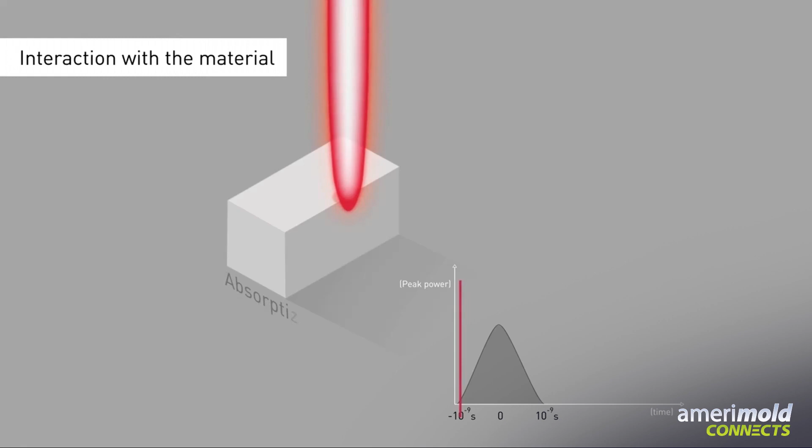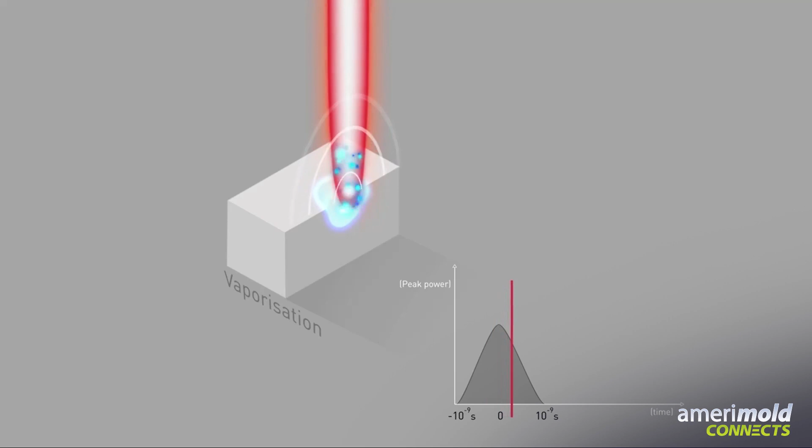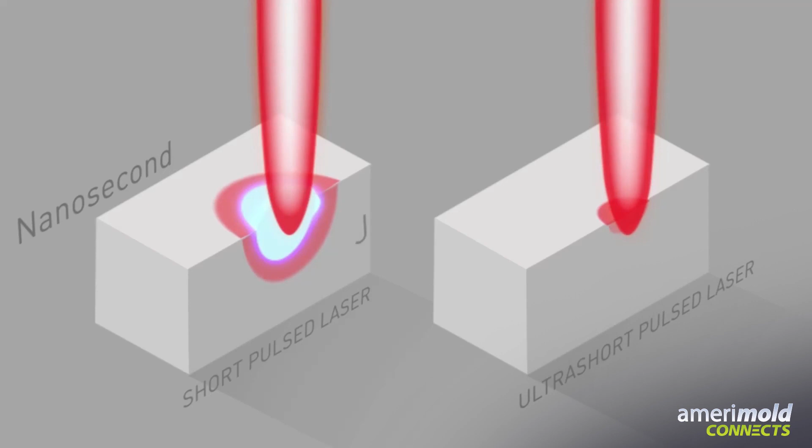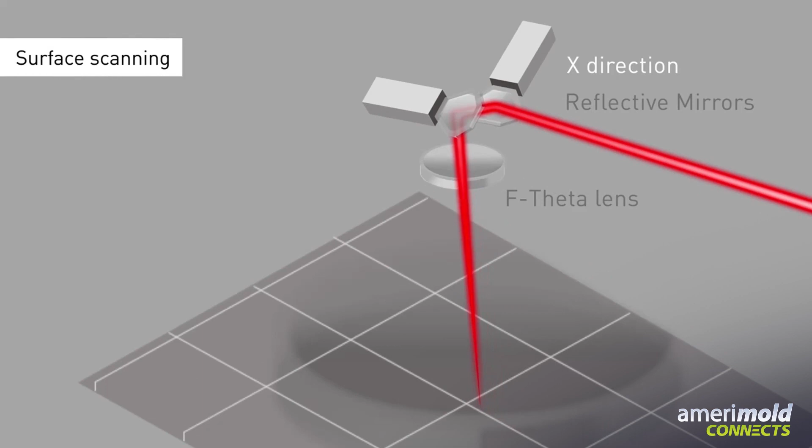GF makes a couple different kinds of lasers. Nanosecond and femtosecond just refers to laser pulse duration, but the one we have here at Wisconsin Engraving is a nanosecond laser. The laser source is in the back of the machine. The laser beam is directed from the source all the way through the machine and out the laser head. Inside of the laser head is a couple of small mirrors called galvo mirrors, which are used to direct the beam along a path.

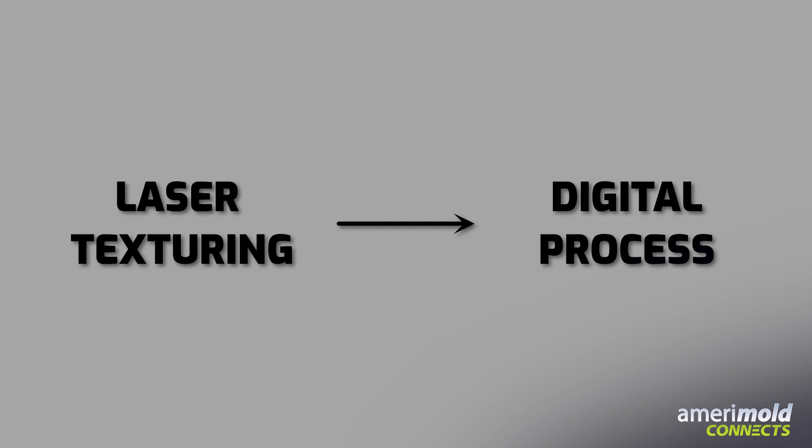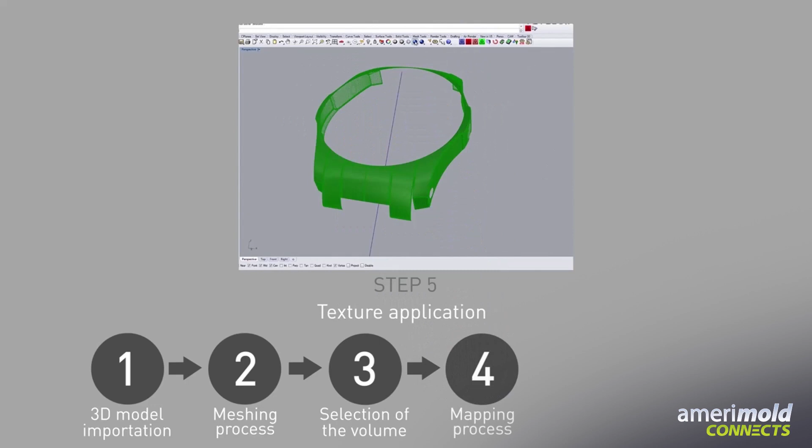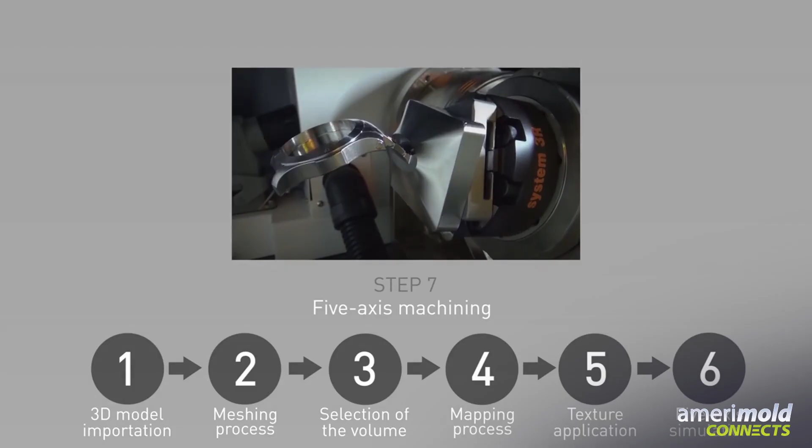It is important to remember that laser texturing is a digital process. GF has a good outline for the digital process workflow, which you'll see in this next clip. They go over it pretty quickly here, so I'm going to give a more thorough explanation for each of these steps. So, we're starting with step 1, importing the 3D model into Rhinoceros 5.0. Once imported, the model has to be carefully placed. We are working off the center of the block for this one, so that's where our 0 has to be.

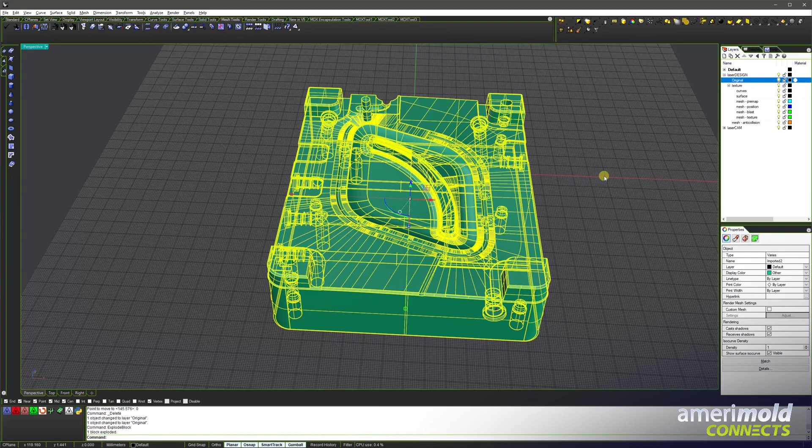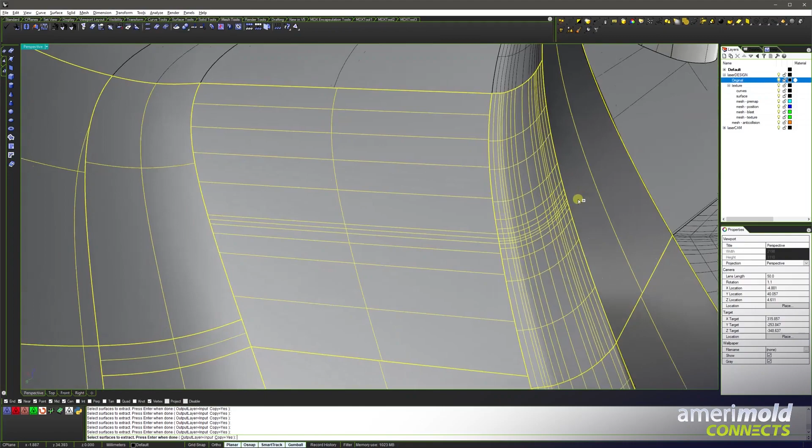The steps are a little out of order, but that's alright. We're moving on to step 3, selection of the area to be textured. Going through the 3D model and carefully selecting the surfaces that need attention. This takes a little bit of time, so we'll just speed through it. The surfaces are selected, everything is joined and organized, and then we can move on to the next step.

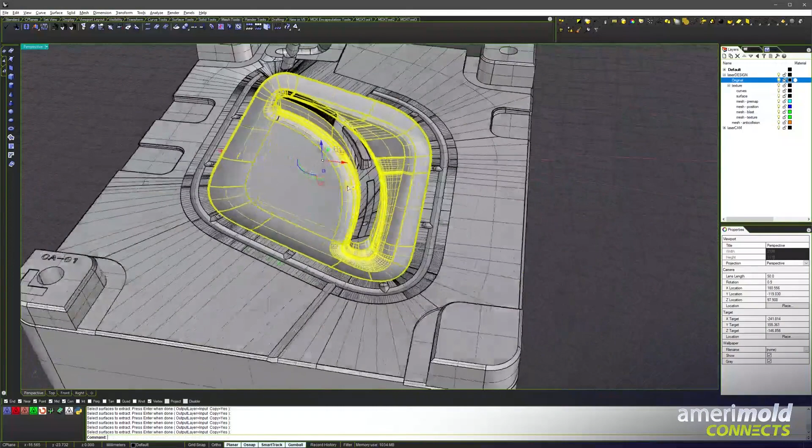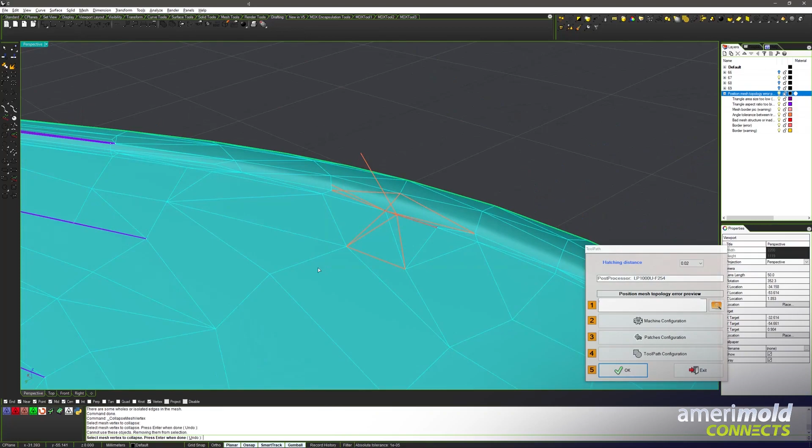Alright, we're on to step 2, the meshing process. The surfaces are selected and converted into a mesh. The box on the right here is GF's laser design application. It functions as an add-on to Rhino. It includes some tools for checking the mesh's compatibility with the post-processing that eventually must happen. Repairing a mesh takes a while, and this can be one of the longest steps.

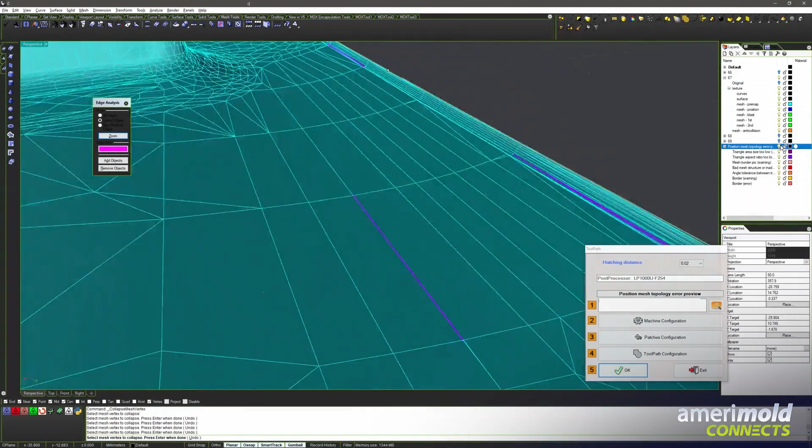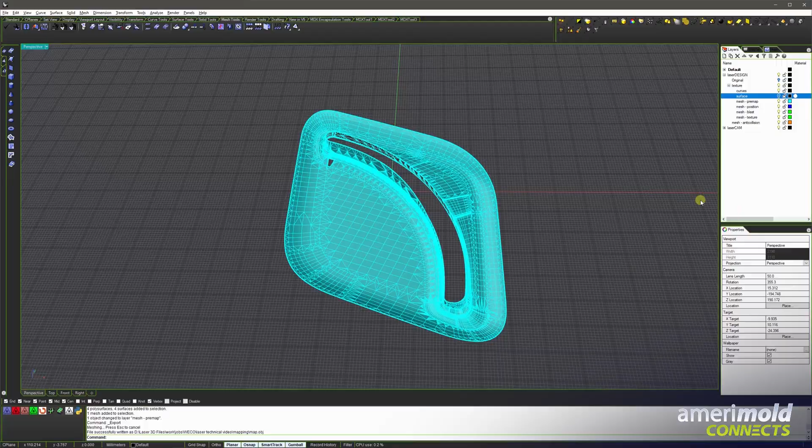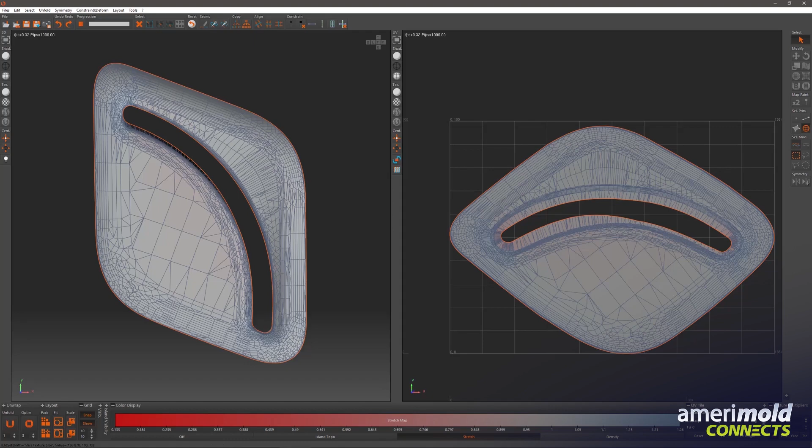Once the mesh has been fully repaired and we're certain it's compatible with the laser design software, it can be exported for use in the next step. On to step 4, the mapping process. The application being used here is called Unfold 3D. This software is used for UV mapping the mesh. It is able to unfold the 3D geometry and flatten it out so that a texture can be applied. After mapping is done, the mesh is exported along with all its mapping information, giving us a mesh that is ready for the next step.

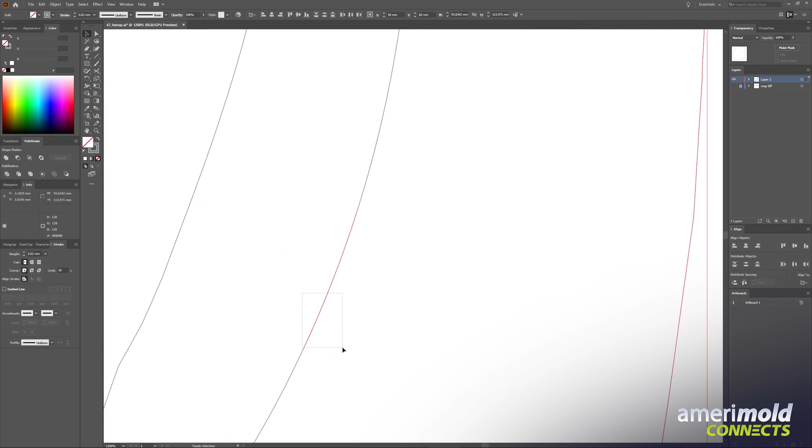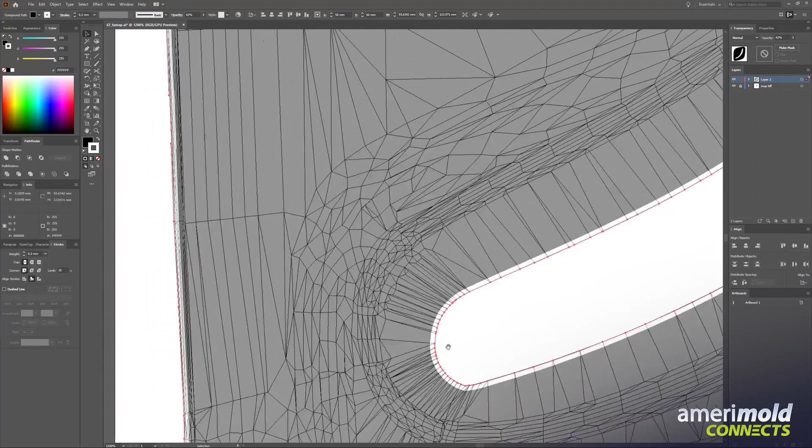Step 5, texture application. This is where we transition into Adobe Photoshop and Illustrator. This part needs a border around the parting line. Fortunately, the previous step gave us some files that can be used to easily add a border around the edges. After the border is done, we export a TIFF file and move over into Photoshop.

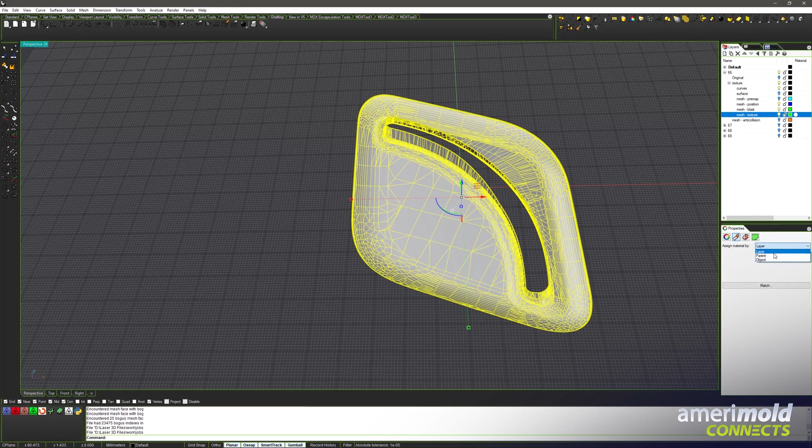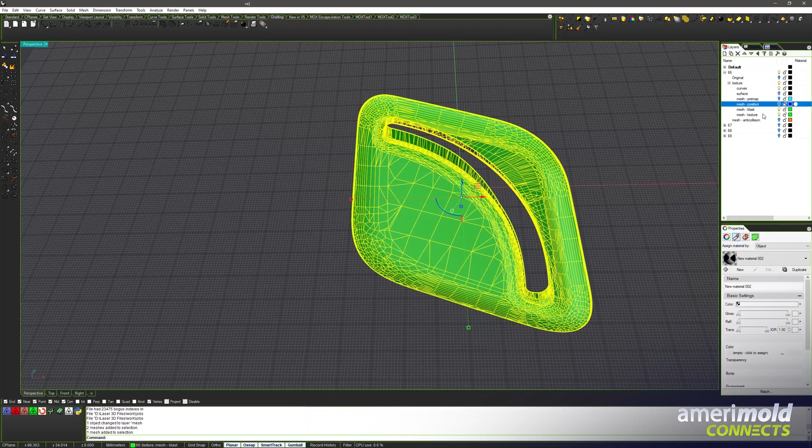In Photoshop, the texture area is selected and filled with a grayscale pattern. GF's laser design software works from grayscale TIFF images. The levels of grayscale in the image are translated into depth of cut with laser design. Black pixels are engraved to full depth, while white pixels have no depth. The UV mapped mesh from Unfold 3D is imported back into Rhino. Then, the texture image from Photoshop is loaded into the object. And we just have to switch to a rendered preview to double check the border area, and it's ready to post.

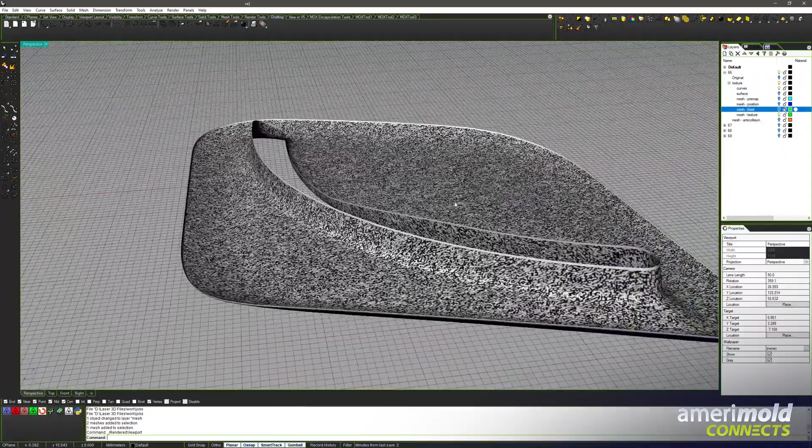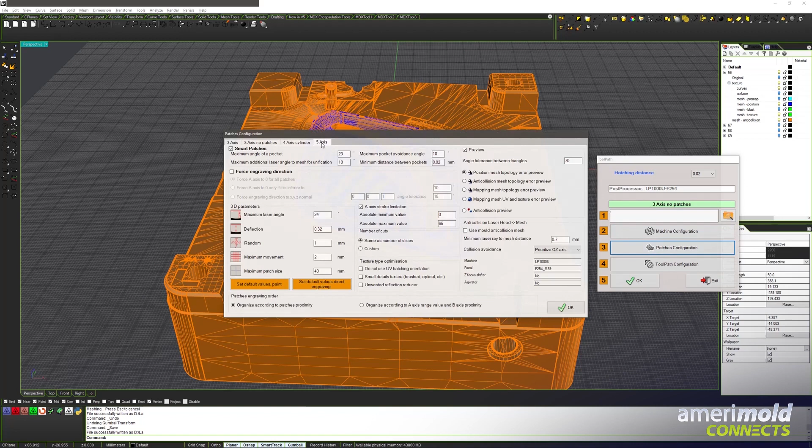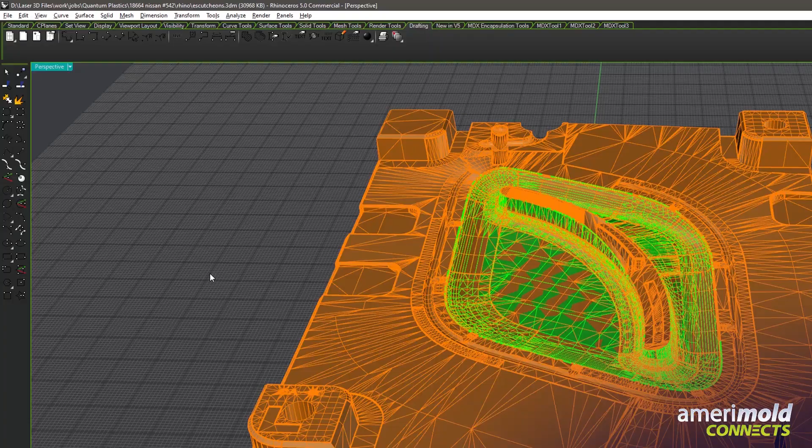Toolpath, patch, and machine configuration are set, and we can start posting. The orange mesh here is an anti-collision mesh. It is necessary for posting in order to make sure the block does not interfere with the path of the laser. After posting, there's an application that GF provides called the Laser 3D Toolpath Viewer. This allows us to look at the toolpathing that laser design outputs. Being able to see the toolpath lines gives a better idea of how the laser actually works.

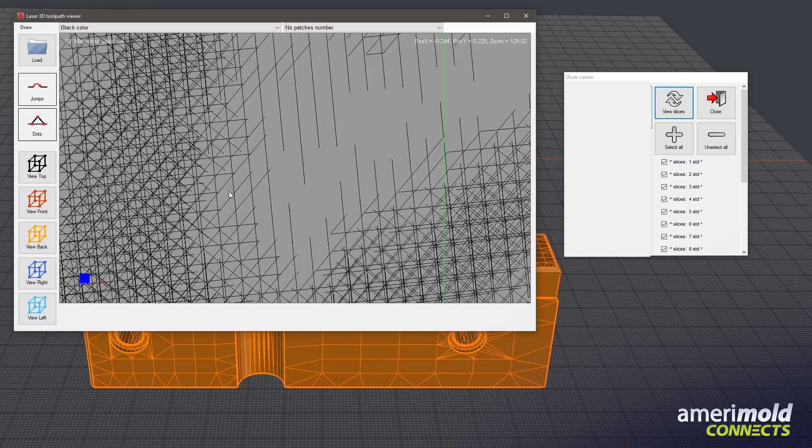The way this machine tool works is no different than any other CNC out there. A tool is traced along a path at a defined speed in the appropriate direction, with deeper cuts being made in passes over the same area. The tool on this machine just happens to be invisible, since it's a laser. Everything looks pretty good here, so we're on to the next step.

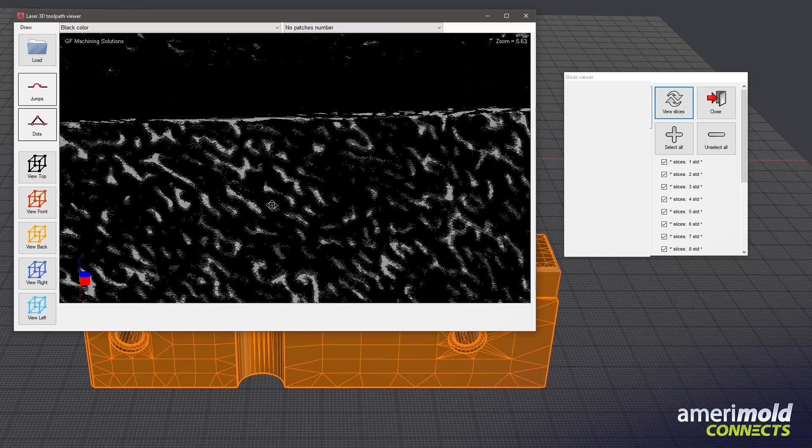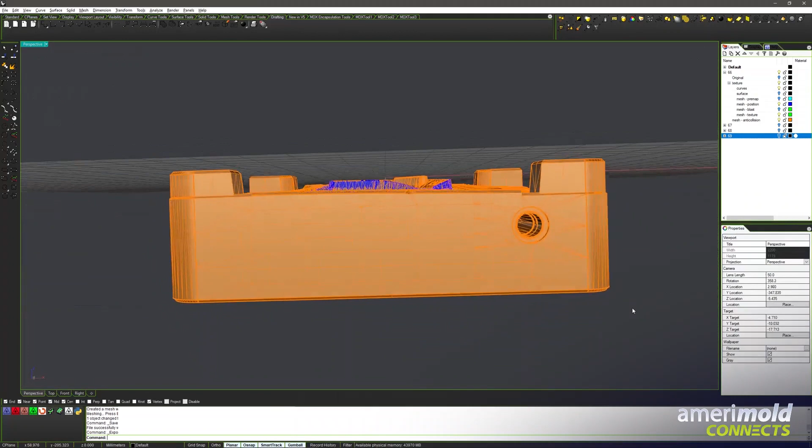Step 6, 5-axis simulation time. Simulating the posted program requires an anti-collision mesh. This mesh is made from the block that is going into the machine, and it has to be positioned properly for use in the simulation software. After making the mesh in Rhino, it is exported for use in GF's anti-collision software. The machine, part, and program are loaded into the simulator. The offset is selected and the program is run. Simulating the program helps avoid crashing the machine.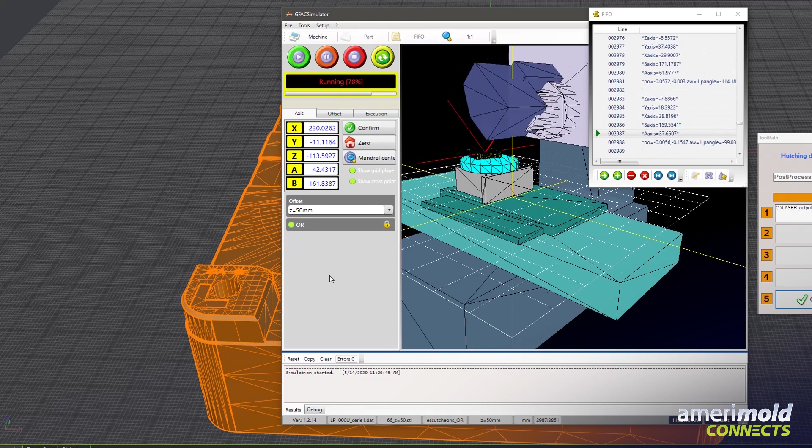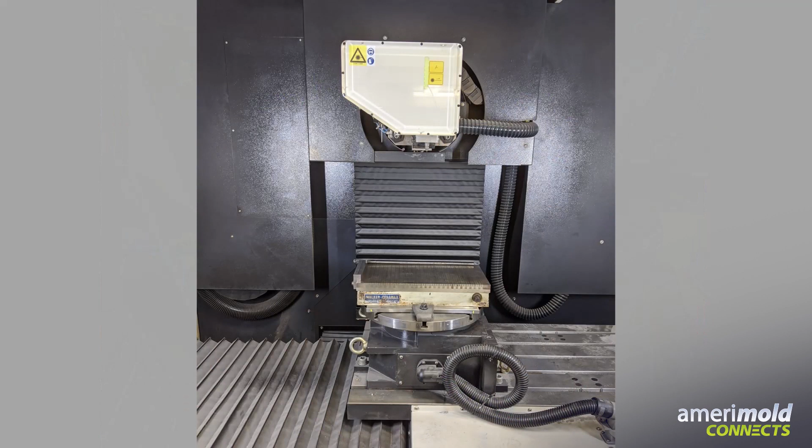Step 7, 5-axis machining. The laser we have here at Wisconsin Engraving is an LP1000U, and it looks kind of like this. The control desk is on the right. Opening up the doors at the front of the machine, the table where the part goes looks like this. So we load the block in and begin to set up the object reference. A total of 7 points needs to be picked up with a probe so the machine knows the position and orientation of the block. We duct taped a GoPro onto the head so you can see the laser at work.

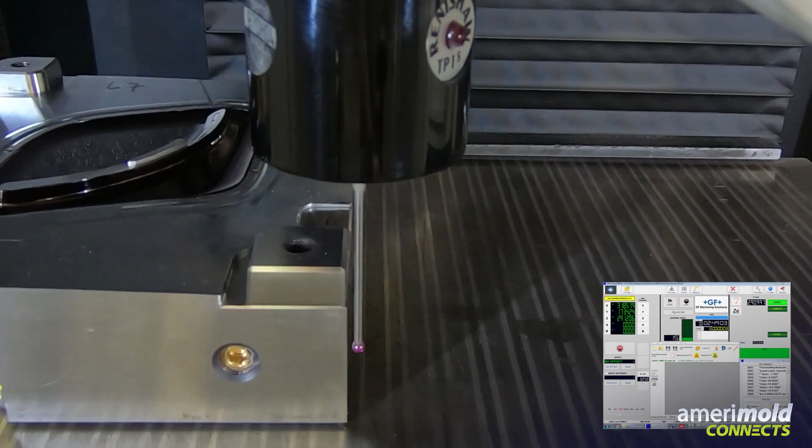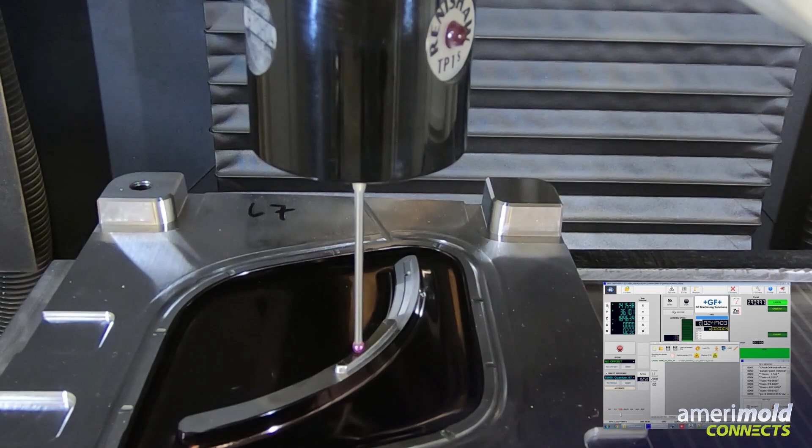After getting the object reference set up, a short, low-power paint removal program is run to make sure everything will go alright during the high-power texturing ablation.

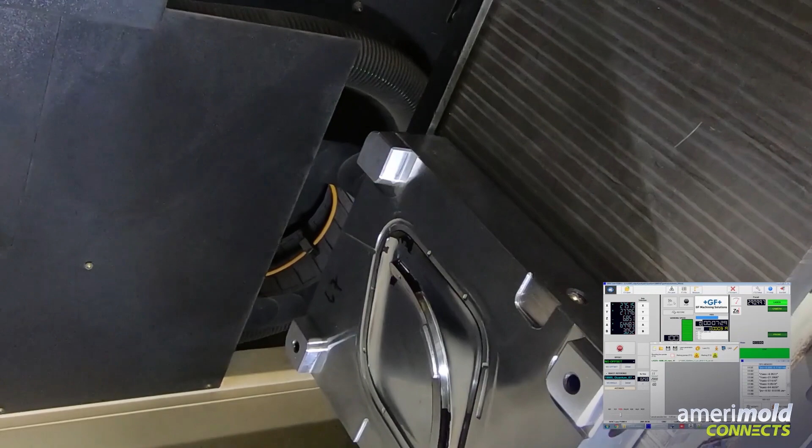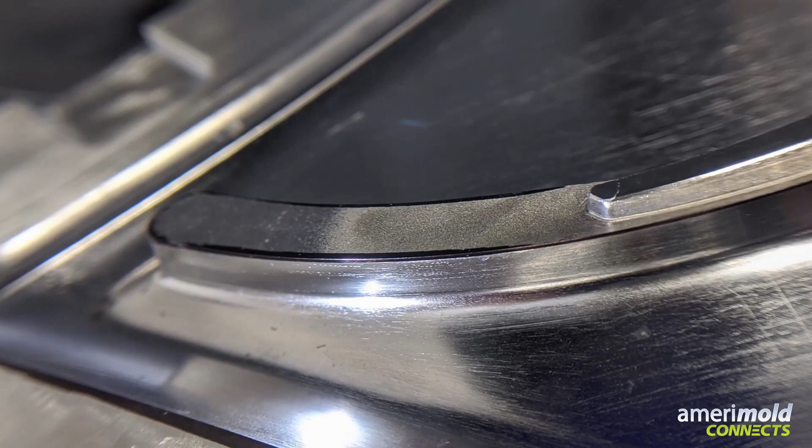Alright, so after the paint removal is finished, the part must be carefully inspected to make sure the laser is hitting where it's supposed to. After everything checks out, the texture program can be run. The texturing took about 3 hours on this part, but we'll speed through it here in about 3 minutes.